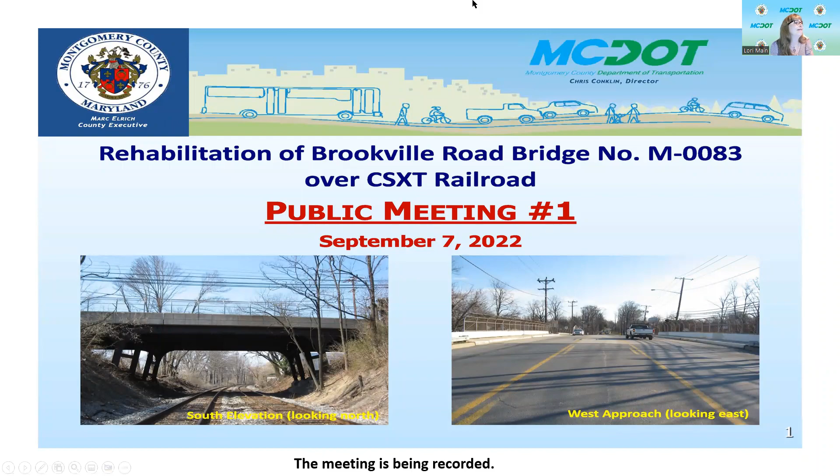Thank you, Lori. Hello, my name is Barry Fuss. I manage the Montgomery County Bridge program. Thank you for attending our meeting tonight presented by the Montgomery County Department of Transportation. This virtual meeting is being recorded, and we will provide a link where you can watch and listen to the recorded presentation. We will try our best to answer all your questions. However, if we run out of time, you can still submit your questions to our project manager, Greg Wong, and he will respond to your questions.

This meeting is to explain our county project to rehabilitate Brookville Road Bridge M-0083 over CSX Railroad. This project will involve reconstruction of the concrete deck, repairs to the steel frame and bridge bearings, and repairs to the concrete abutments, wing walls, and slope protection.

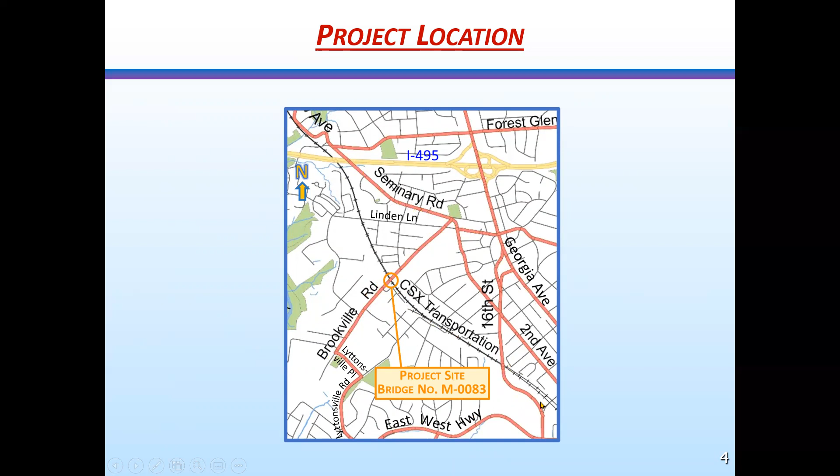The 2017 approved Greater Lyttonsville Sector Plan classifies Brookville Road from Lyttonsville Place to Linden Lane as a two-lane minor arterial road with an 80 feet minimum right-of-way. The 2018 approved Montgomery County Bicycle Master Plan recommends a shared use path on the south side of Brookville Road. The roadway is posted at a 25 miles per hour speed limit.

For the traffic counts performed by Jacobs on Wednesday, November 3rd, 2021 at the bridge, the average daily traffic is approximately 11,500 vehicles per day, including 2,366 heavy vehicles in the morning and afternoon rush hours. The traffic count also recorded 26 pedestrians and 1 bicyclist in the morning rush hours, and 21 pedestrians and 2 bicyclists in the afternoon rush hours.

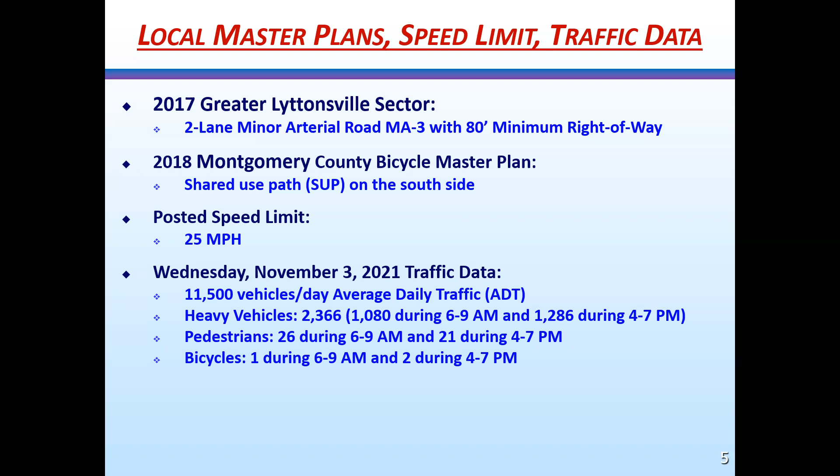Now we will have a brief review of the existing Brookville Road Bridge to be rehabilitated. The existing bridge is a structure reconstructed in 1976 and is a 123 feet 6 inch span, 3-span steel rigid frame with concrete deck structure. This structure carries a 50 feet clear roadway width with 2 19 feet 6 inches travel lanes and 1 11-foot center left-turn lane, plus 1 7-foot sidewalk and 1 foot concrete parapet on both sides for a total out-to-out structural width of 66 feet. It's supported by concrete abutments and pier pedestals.

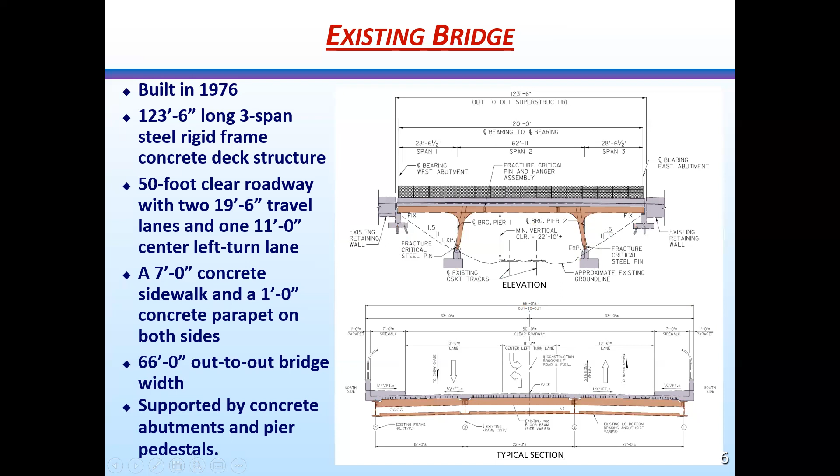These photos give you a looking-north bird's eye view of the existing Brookville Road Bridge and approaches between Talbot Avenue and Warren Street.

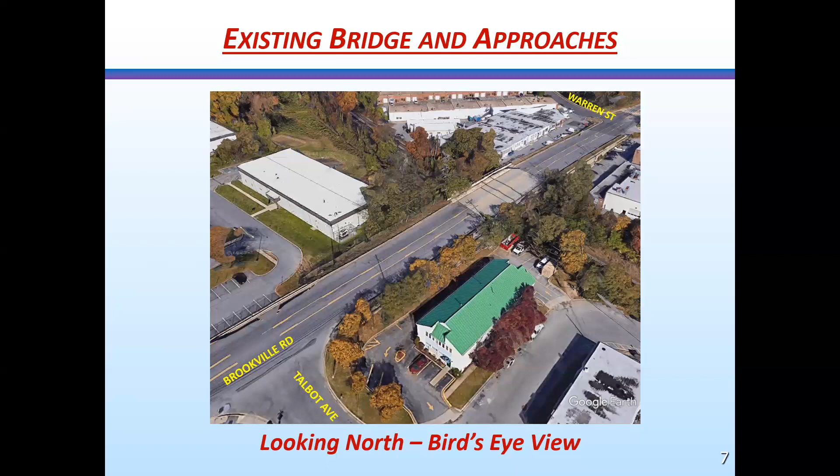The most recent bridge inspections reveal the existing condition of the bridge. This slide and the following 3 slides depict the bridge deteriorations. First, the concrete deck: deterioration includes minor edge spalling along the deck joint, failed patching on the surface, and a torn compression joint seal with lost adhesion and depression. The January 2022 corrosion and chloride testing revealed high chloride within the top 2 inches of the deck.

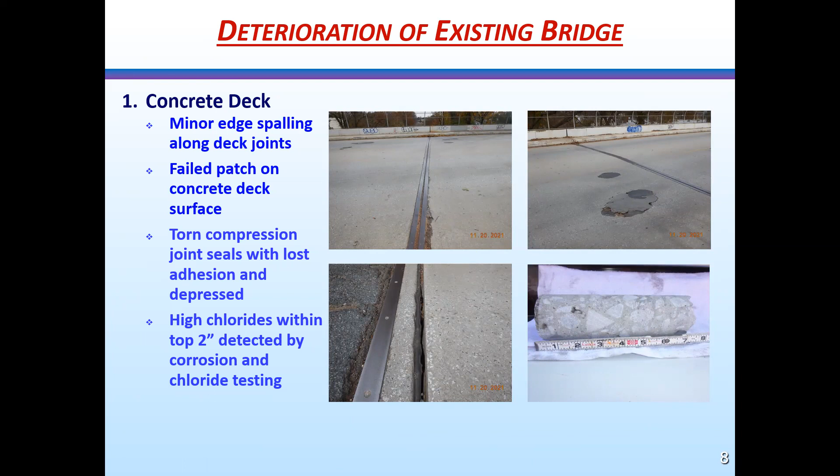Second, steel frames and bearings. The photos in this slide show that pack rust, minor to moderate corrosion, delamination, and local distortion are in evidence at the girders, pier, floor beams, and bearings. An ultrasonic examination was conducted in 2019, which revealed non-discernible cracking at the girder pin and hanger connection, and the pinned pier bearing assembly.

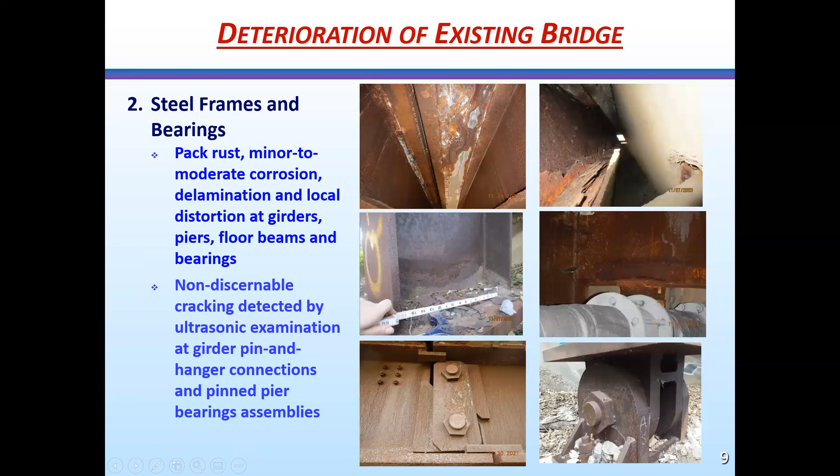Fourth, concrete slope protection. The concrete slope protection has cracks, spalls, and delamination at the top of the slope protection, with slight sliding and local undermining. Fifth, approach roadway asphalt pavement. The approach roadway asphalt pavement has moderate to severe cracking.

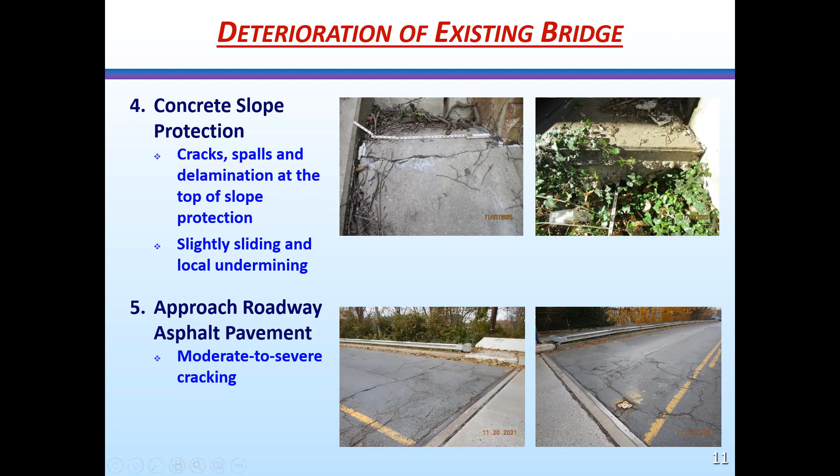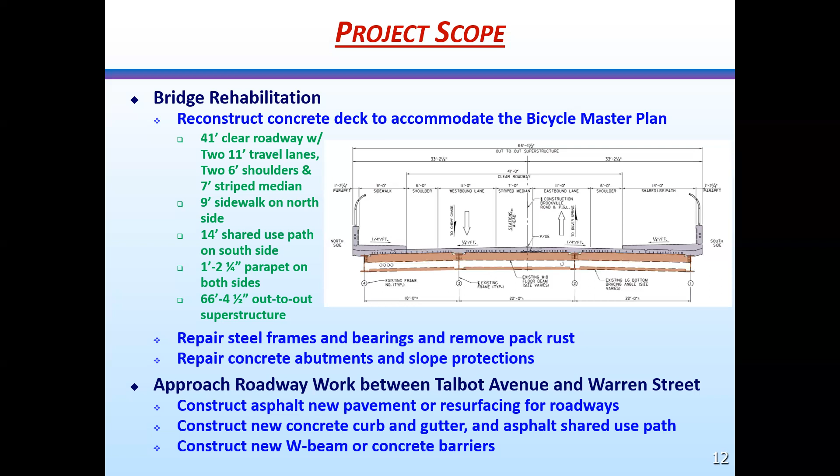The existing steel frames and bearings and the concrete abutments and slope protections will be repaired. Approach roadway work between Talbot Avenue and Warren Street will be implemented to provide transition to tie into the existing roadway. The work includes construction of new asphalt pavement or resurfacing for the approach roadways, new concrete curb and gutter on both sides, new asphalt approach shared use paths on the south side, and new W-beam or concrete barriers on both sides. However, sidewalk connection on the north side of both approaches will not be provided under this project.

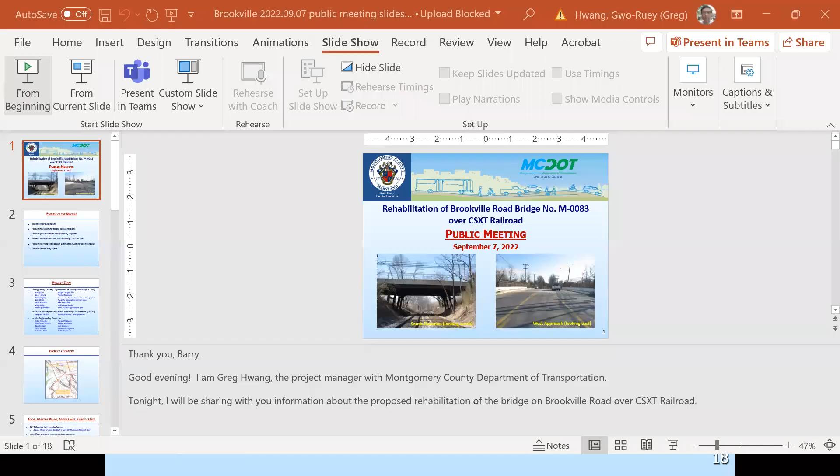Thank you, Greg. We have a couple of questions in the chat. William Le Roy would like to know, are there long lead items impacting the schedule, such as steel components? Would you repeat that question again? Are there long lead items impacting the schedule, such as steel components? No, we don't expect that at all. This is a bridge rehabilitation project, and once it's completed, everything will be done.

Will that answer the question? Next question: will there be a construction vehicle management plan that coordinates with Woodland and Purple Line construction vehicles? We do not expect there will be any conflict due to the maintenance of traffic between these two projects, as the project will maintain two-lane, two-way traffic all the time during the construction of the bridge rehabilitation.

Why is the bike lane on the north side of the bridge when the bike trail will be on the south? We will not provide any bike lane on the north. I don't see anywhere having a bike lane on the north now or in the future, even for a short time. According to the master plan, we provide a shared use path, which is the bikeway on the south side. Once that's completed, we will not do anything else. So that's what we are proposing to accommodate the county's bicycle master plan.

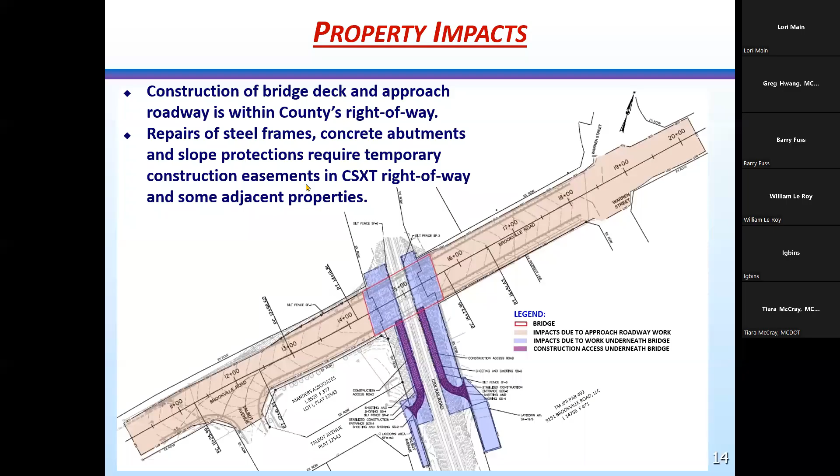Greg, can you please put up the drawing? Yes, I would be glad to answer. You will be able to see that there will be 2 lanes in phase 1, and 2 lanes in phase 2, in all phases. This is 2-lane, 2-way traffic, even after hours.

And the bicycle will at the same time utilize the travel lane. So in phase 1, you'll demolish the south side? Phase 1 we will demolish the north side and construct the north side, while maintaining traffic on the south side. I see. And when you get into phase 2, it will be reversed, traffic will be maintained on the north side while the construction is on the south side. Great.

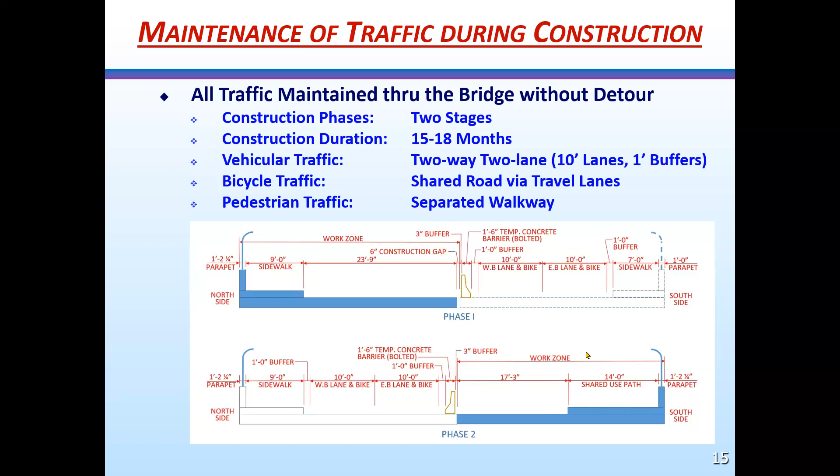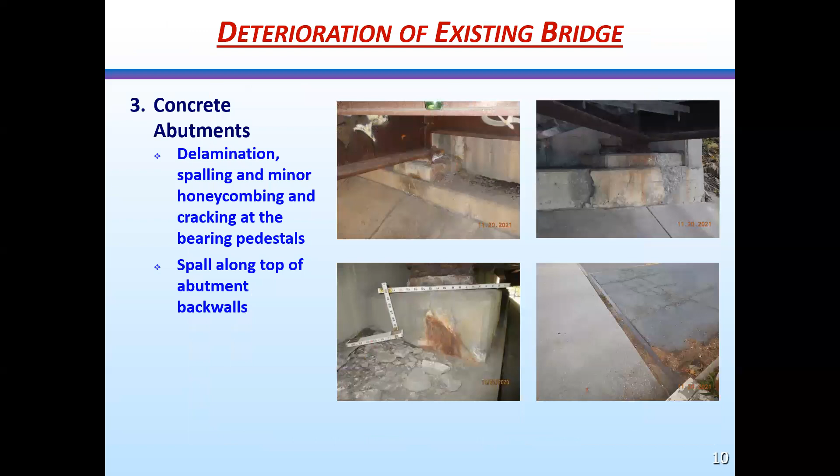I noticed that it looks, on the north side, is that extending further to the north, or is that in the same place as it is now? You mean that section right there? Yeah, is that grass? Yeah, and this grass will be almost the same as the existing.

So we are not planning to provide sidewalk connections on this side, because there is no sidewalk, but the sidewalk will be provided on the bridge. That will be available when a sidewalk project in the future is implemented to complete the sidewalk along Brookville Road. There's a master plan to include Brookville Road with more of a boulevard design, but since there is not enough space at this moment, we do not want to provide a sidewalk connection at this time.

Great, all right, appreciate it. Thank you, that's all.

Okay, that's all the questions that I had in the chat. Would anybody else like to ask a question?